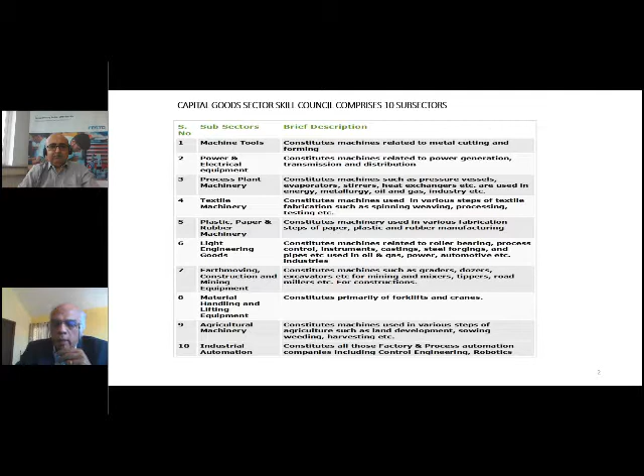From the year 2013 by the Skill Council, which is established jointly by the Federation of Indian Chambers of Commerce and Industry and the Department of Heavy Industries, anchored by the private sector of capital goods industry as well as public sector, and Ministry of Skills and National Skill Development Corporation.

It is chaired by Mr. Sunil Chaturvedi, who is heading himself. He was an IAS officer and then followed by heading a company called Tractors India Limited. We have a big team of people across the country, mainly headquartered in Delhi.

A total of 55 qualifications, which mean job roles, comprising over 96 unique national occupational standards, have been developed by the council. All the qualifications have been validated by a minimum of 30 companies belonging to large, medium and smaller enterprises. All the qualifications are now aligned to the National Skills Qualification Framework, and that has been finally registered into the National Qualification Register. They are also mobile internationally.

The main task objectives of this council are to develop national occupational standards and qualifications. At the end of a few more years, we will have 250 qualifications comprising many job roles, including future job roles which are emerging due to Industry 4.0, and affiliation of training partners and educational institutions to deliver the standards.

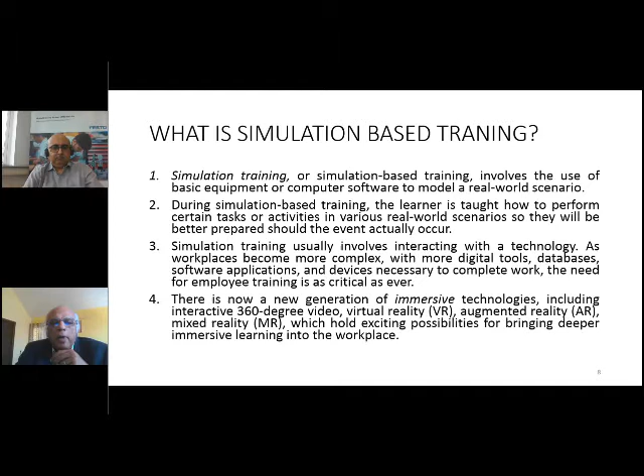And last but not least, there are now new generation of immersive technologies, including interactive 360-degree video, virtual reality, augmented reality, mixed reality, which are holding exciting possibilities for bringing deeper immersive learning into the workplace. My last slide is to tell you briefly the 8 benefits of simulation-based training.

Simulation-based training gives you real-life experiences. The instructor can give immediate feedback to the trainees. There is a lot of knowledge retention compared to just observing a PowerPoint presentation, because they are very closely interacting. It is experiential-based learning, so knowledge retention is very good.

The risks are minimized because it is not actually a real life situation. It is only simulating the real life situation, so we can afford to make a couple of mistakes and correct ourselves before we launch into the real life situation.

There is quantifiable training. Everybody can be measured, the training can be measured, and it could be used as part of further improving the training programs, or assessment and certification of the trainees, or even for their performance assessment during their actual working in the factories. And of course, it can also be used for multiple purposes.

Simulation is not necessarily only for training purposes. It can also be used for actual augmented training during the on-the-job training concept. And very, very important, simulation brings down the cost of training and also the speed of completing the training and going into the real operations. Both cost and time are reduced.

Finally, there is a lot of cooperation between the trainees and the instructor. The trainees can teach each other and the overall synergy is very high. You can also have competition during the simulation of a group exercise where you can have projects, and the trainees get very much benefited from this.

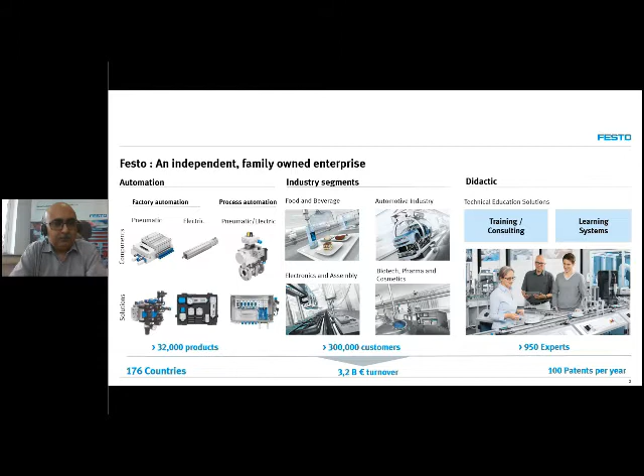A part of Festo is automation, a part of Festo is didactic, and it's the best symbiosis we can have for industry and education. Automation has components and system solutions to increase productivity of machines and systems, and from the didactic side, with learning systems, training and consulting, we increase the efficiency and productivity of people in the organization. This is what we as a group are doing, increasing the productivity of more than 3 lakh customers worldwide that we cater to.

In terms of technical education solutions, we have a holistic offering in terms of education, wherein we have a lot of equipment. We come up with a lot of holistic curricula with support for lab design and preparing the trainers, ensuring the right delivery of the offering.

In terms of industry, we support with consulting and training on different topics through our own training centers and also partner training centers. As a group, we also support in terms of qualification. We run dual vocational training programs as per the German system, which is worldwide renowned. We do it even in India, and we'd be very happy to share such experiences.

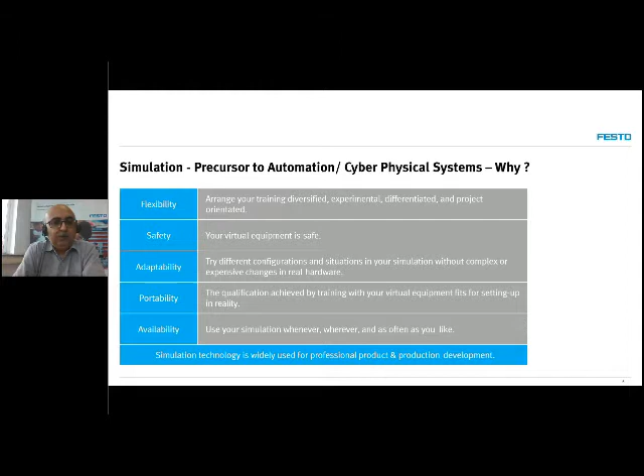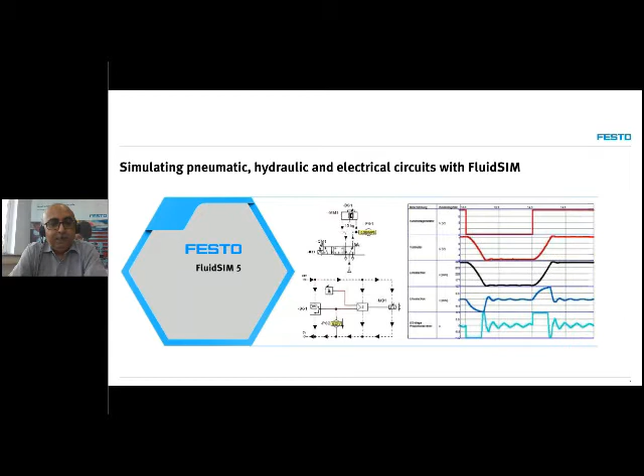Our presentation and live demo is done in two major parts. First we would touch on the schematics - how pneumatic, hydraulic, and electric schematics are simulated, and how we can take benefit of that. We as colleagues from Festo have software, so as an example we are using our software, but it can be taken in general for simulation activity. For the schematic part, we will be using FluidSim, where we will show you a demo after my next few slides. So basically what one should look at in simulation as a tool, whether you want to learn, teach, or design in the industry.

It has to be interactive in terms of virtual devices, the library part, how intuitive it is, how fast are the simulations, and the failure model and diagnosis. When we say interactive, FluidSim allows both convenient creation of schematics as well as interactive simulation. It can also be connected to external hardware, going into exactly the case of digital twin, how you connect software and hardware together and have a seamless integration. This becomes a very fundamental learning from that perspective.

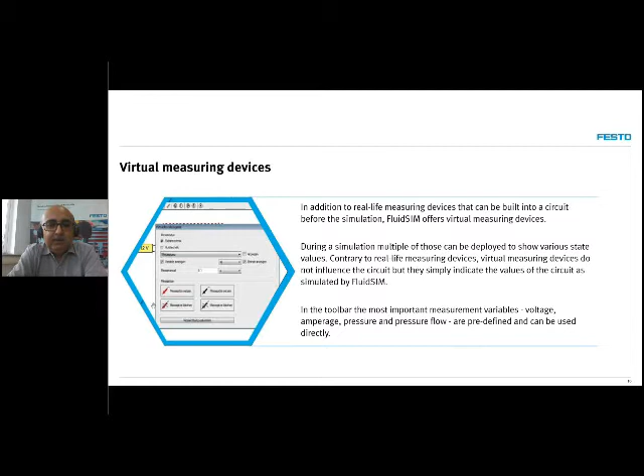Then virtual measuring devices. In our systems we have devices, but when we need to add more physical devices, it may take part of the power or reflect in a certain part of the schematic. But with virtual measuring devices, we can deploy them into the system without affecting the working of the schematic. As standard, FluidSim supports certain measurements very easily, like voltage, ampere, or pressure flow, which are predefined and can be used directly.

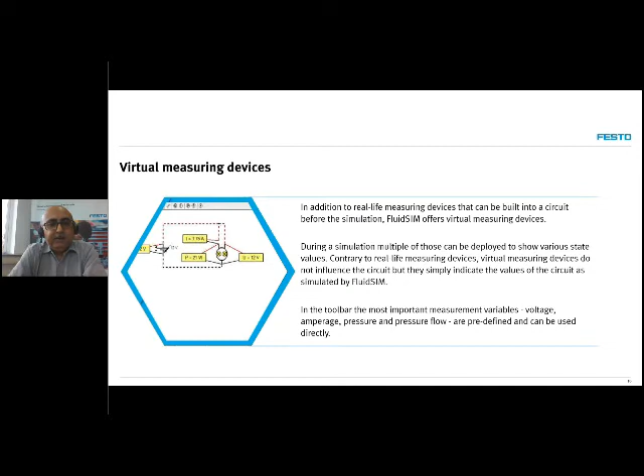The library of symbols is important. On one side, it helps you create the schematic faster with the availability of a large pool of symbols. On the other side, it's also very important that symbols are used as per standards. That's very important to have in any simulation tool.

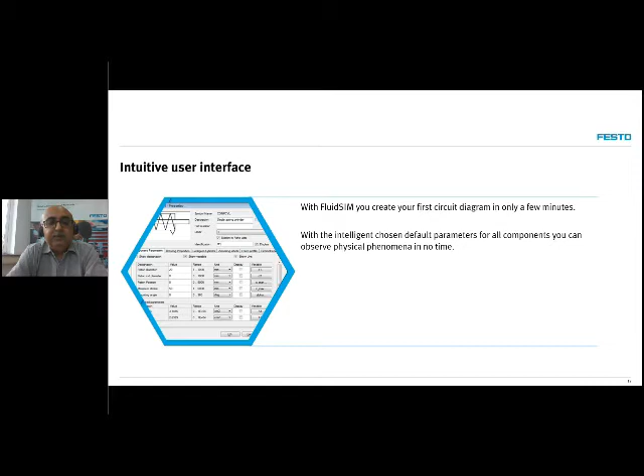The intuitive interface, I will not talk about it. We will actually show you how intuitive it can be, how fast you can draw a schematic, how you can simulate it, and how you can observe the different parameters in the system.

Yes, it has to be lightning fast. FluidSim, as we said, we have been there since the early 90s, and we have been consistently designing it for higher speed, which is very important because a simulation tool's testing has to be in real time. For example, if you define different parameters to a component, you should be able to see the difference in their operating, based on those parameters. Some part could be visible through the naked eye, or even through different reports. We will try to show you a small part in our demo of how it is important to have testing in real time.

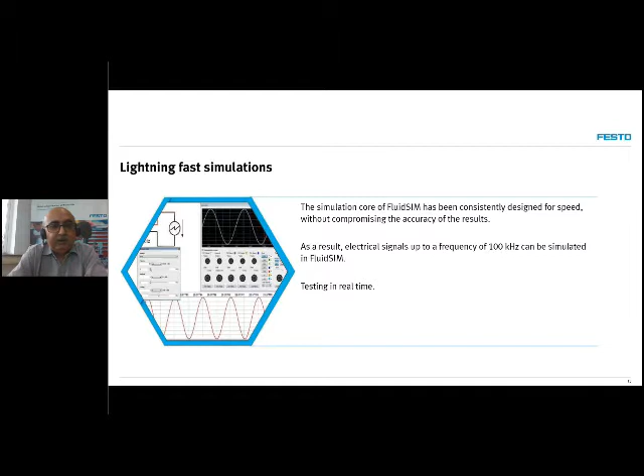And with any learning model and maintenance part, without going into details of preventive maintenance, it is very important to understand how we can look at failures and how we can diagnose them. That becomes a very important part of a simulation exercise.

So now I will invite my colleague, Mr. Senthil Kumar, to offer you a small demo on FluidSim. He would do it in 3 parts. The first part would be a very small schematic to draw, showing how easy it is to draw with FluidSim and simulate. As a second part, we would show how we can observe the difference in parameters of 2 components in terms of reports. And third, we will briefly touch on how, if there is an industry application problem or a learning task available, how to go with it, observe it, create a schematic from there, and then work on that.

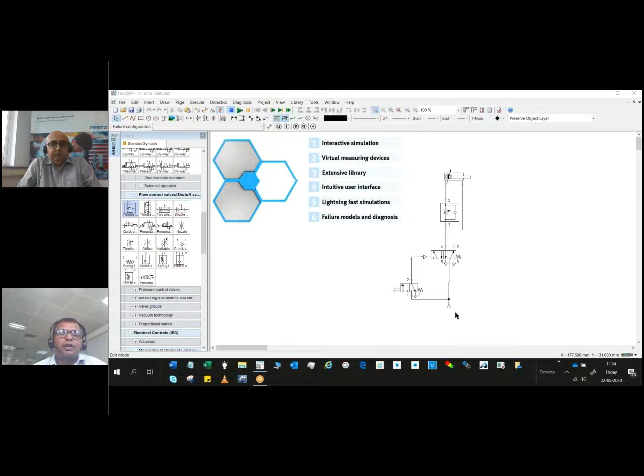It has got a component library with all the components frequently used inside automation, which can be easily brought into the working area to create a circuit. I have made a circuit ready-made, and I will also show you how exactly this can be realized.

If you look at the possibilities with simulation, we can run variations. We can change the parameters without even incurring any cost.

But if you look at the real situation where you have to make changes, you have to wait for days, procure them, and finally include and make a decision.

Further, as we realized, it involves risk assessment, in the sense that you can very easily minimize the risk. Having to build something, make it work, and have it break or result in some unsafe eventuality - simulations can help us minimize those things.

We can reproduce this infinitely, with no cost involved, because the component libraries we see here can be used innumerable times in this working arena, and we can realize whatever we have in our imagination in practice.

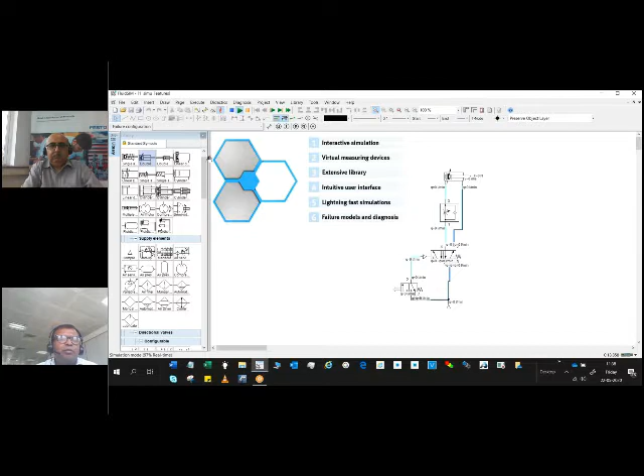Making a circuit with pneumatics, electrics, hydraulics, or closed loop pneumatics, whatever the thing is, is not a very cumbersome process. It is made very easy.

You can only click on the library and drag and drop those components, pull out any component from the component library once we are aware of the basics of the technology. I am recreating the same circuit that is being done here.

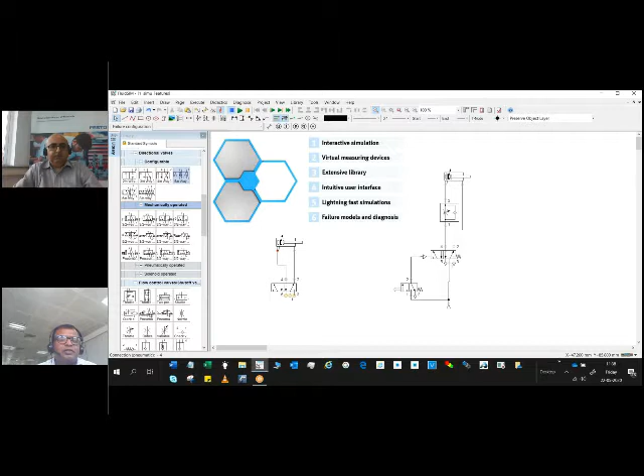The connections here are actually very easy - you go to the node, drag and drop them, and place them inside the circuit. The supply of air is what we require.

We might also need less of those things, so we will try to pull any of the flow control valves or whatever is necessary here to make use of that.

Since I have already done this, I will try to simulate this circuit. It is very easy to do this - that's what I was trying to explain to you.

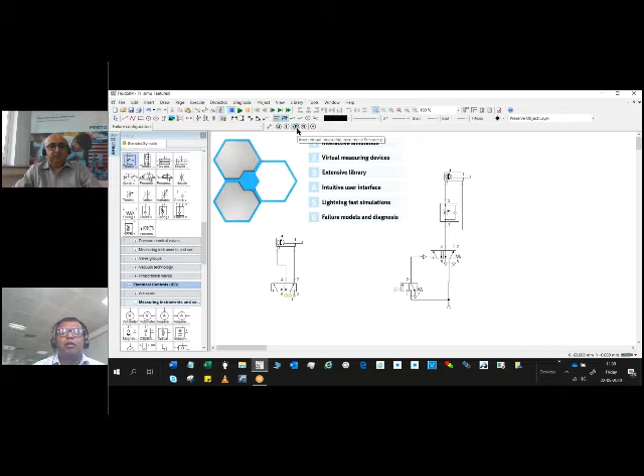So as you go along like this, there will be this circuit which I have drawn here. I just click on this, so I can switch on the thing. If I want to include any virtual measuring instruments, I can bring it over from the arrangement here. Say I want to bring in some pressure control, some pressure gauges or something like that. So I can connect it over here and start to simulate this.

So here we can see the same thing. What happens in this situation is the pressure over there is about 6 bar. You can realize that momentarily, at every instant, dynamically, we can realize what exactly is happening inside the circuit. This way we can bring in any of those measuring instruments, any virtual instruments as such.

It is very easy. Of course, it will not load the circuit because it is going to be working on the mathematical formula rather than on the physical connections that might be existing over there.

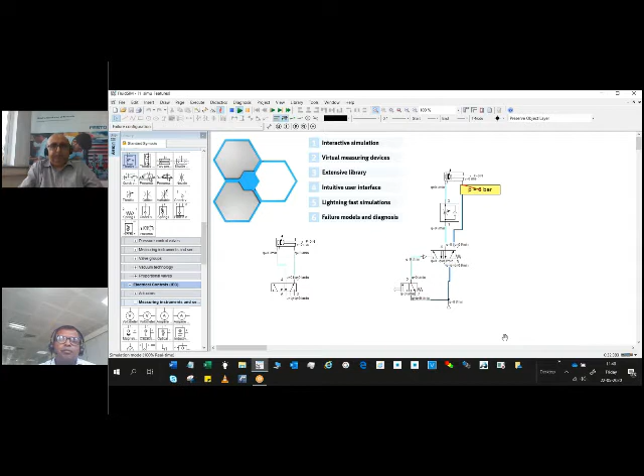So this is about a few of those features which we described a little earlier. We will look at the other possibilities here.

So FluidSIM, as I was telling you, can dynamically display the status of every element inside the control. This way we can realize, optimize, and fine-tune it to precision whenever expected. Here are two cylinders which are of different sizes in the same arrangement.

We can configure this cylinder just by clicking the button over here and changing the parameters in the circuit. So basically you can create some loads inside the arrangement, or change the component details, such as the piston diameter and rod diameter. This has been made in such a way that it can include a complete range currently available in the market.

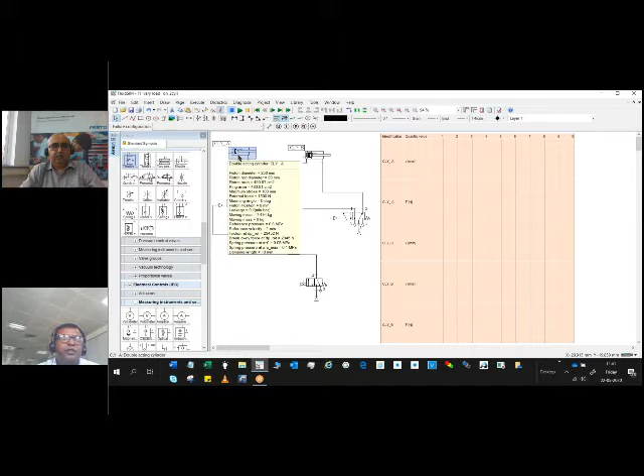So that is what we can see here. Let us try to simulate here. Of course this is configured differently. You can see there it is subjected to a load of 1500 newtons, whereas here it is subjected to a load of 5000 newtons. Let us see how exactly we can try to depict the performance of the cylinder here.

So this is based on the time-based arrangement. It is able to give you a complete picture of how those cylinders are reacting at various stages inside the circuit. You can see a lot of ripples coming over there, which is nothing but the slip-stick motion being executed by the cylinder there, which can be seen.

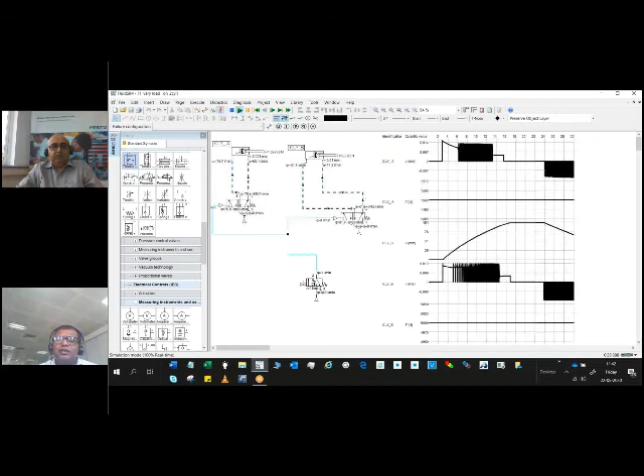If you extrapolate this graph, you can also see what time it is happening and to what extent these are seen there. So that is the other part of simulation. Further, let us go into the next slide here. So this is the other feature there.

We have many situations where we have to realize many of the applications on the shop floor. Here is one such application where some pins are contained inside a hopper, which needs to be pushed one after the other. The pins are to be fed continuously by to and fro motion of the cylinder.

The feeding of the cylinder has to stop when the stop button is pressed. There is a double acting cylinder inside this arrangement which has to reciprocate, which means we need two position-dependent controls, and in addition we have a push button to start the operation, by which it can continuously reciprocate, and by press of the other button it has to stop. So this is the graphic, the positional sketch which is existing to be constructed on.

This is to be physically replicated later on after validating with the help of the FluidSIM. Having had this problem, there are possibilities that straight away we can go and construct it and try to realize the deficiencies in terms of outputs, or whatever is the expectation prescribed. Otherwise we can try to do simulation, which as we talked about saves us cost.

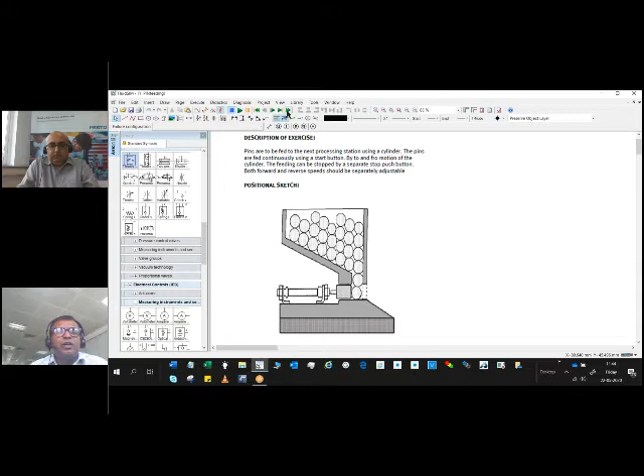So here is this arrangement where, with the help of simulation, we can try to build this. Here is the circuit for the pneumatic circuit. I will show you two variations on this. One is the pneumatic circuit, and finally we'll discuss the possibilities in terms of flexibility, safety, adaptability, portability, and availability. So first let us go into the simulation here.

So here is the circuit. Now you can see many of those features in terms of the flow, the pressure, which has been called for to be exhibited when it is moving, and this is not a static one. It is going to be dynamically displaying all those things, like of course the forces are also going to be displayed here.

As I was explaining, these are the two buttons which are to be used here. This is for the start and the other one is for the stop as such, and these are the two positional dependent controls that are going to be available here, and the cylinder has to reciprocate as such, and of course the speed has to be controlled as such.

So let us see what is happening here. You could see the cylinder getting reciprocated in and out, and you could see visually there what is the speed. Velocity is being described over there, and it is possible for us to clock how many times the cylinder will reciprocate, what will be my production output as such.

The circuit is flexible enough because we can at any instant stop this thing and add different elements that might improve or enhance the performance of the circuit as such. So that way it is very flexible.

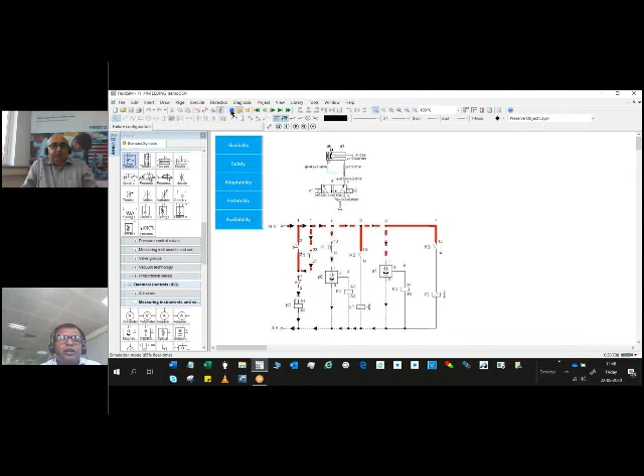If we have noted down the speed earlier, and we see how this is going to react and how fast it is going to work in a minute or something like that, it will also try to improve and optimize the thing in terms of the controls. So that is about the pneumatic, electro-pneumatic part as such.

We will now try to go into the other important feature in learning situations, in maintaining the equipment at our plants, in trying to teach the employee, the operator, whether he is able to do certain things here. Here is a simulation which can be included inside the FluidSIM, where we can create errors in all these components. For simplicity's sake, I have included a very simple circuit inside the arrangement.

So here, we are trying to teach them, or maybe explore what is the skill level, then look at what is the training need or skill gap that is there, and include some training as such.

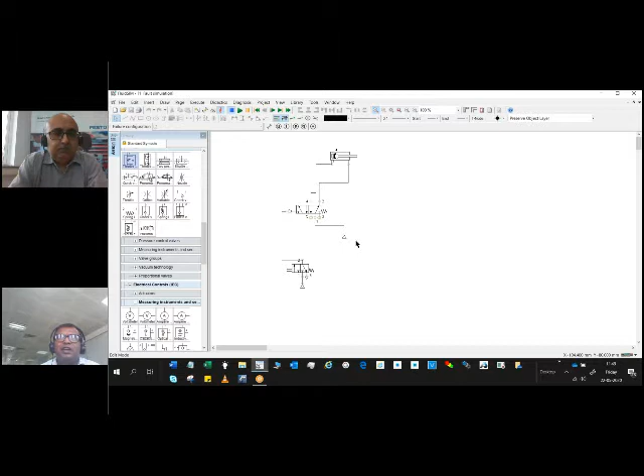So here is this arrangement where we have specifically included an error inside the circuit. When I press this, it doesn't work, because there are realistic problems that can occur in the physical world included here in terms of the valves or something like that. We try to impose certain errors or faults inside the circuit that the maintenance person can identify, as this can exist in the actual machine.

So I have included this, and of course the circuit doesn't work, which can also exist in the physical arrangement. So I will ask him to maintain it or troubleshoot this arrangement. I specifically go to this place which is wrong in terms of identification, which is also depicted over here. That means he is not realizing why this problem exists or how it has to be effectively tackled. It is only going by trial and error.

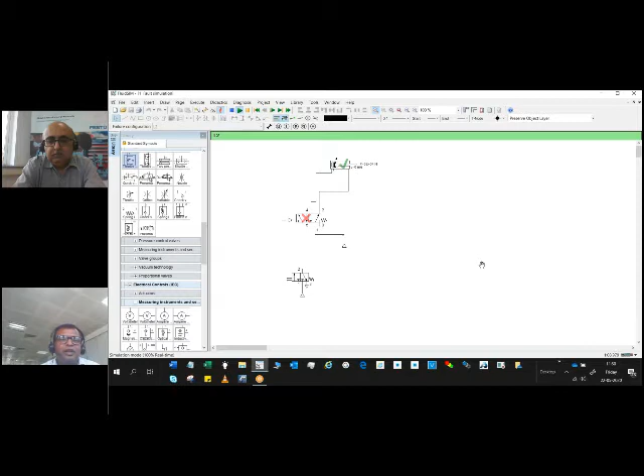Let me do one more attempt with this. I will try to see the problem is here. Yes, this was the right thing that had to be identified at the first instance. What I did is I placed excess friction inside the cylinder, that's why the cylinder is not moving.

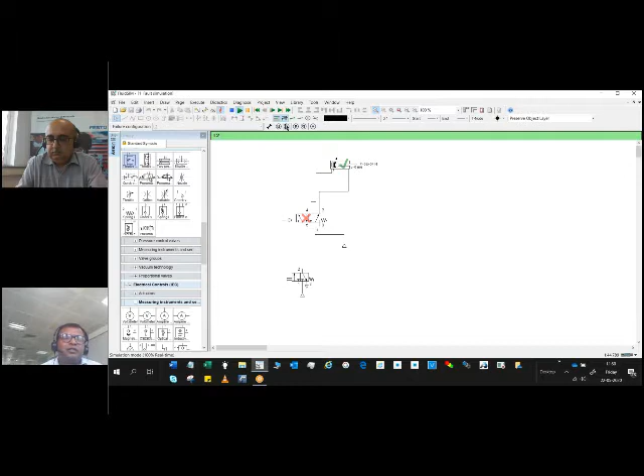Similarly, for every component, all possible failure possibilities are included, which can be selected and used for training purposes or to troubleshoot in a virtual world. So without spending time, energy and money, we can very easily realize this sitting on simulation and explore these things. These are the things I wanted to briefly tell you.

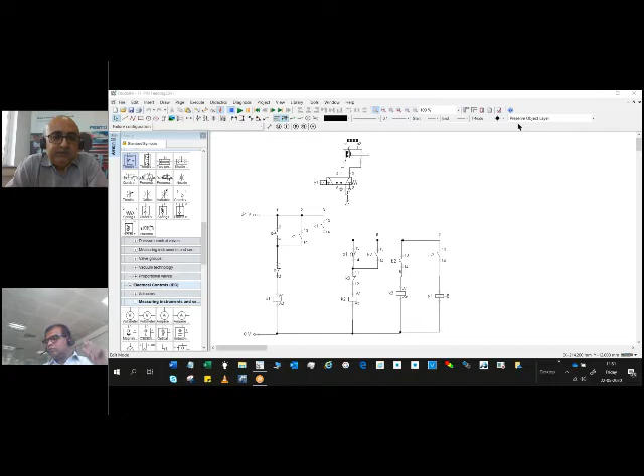Because of the time paucity, he had to rush and show just a few things. But the idea was to demonstrate how to use the tool for designing, teaching, and learning. The best part of simulation is, because of the current situation where we have to work and teach remotely, this becomes a really wonderful tool. May I please request the screen for presentation so I can have a very short, quick session.

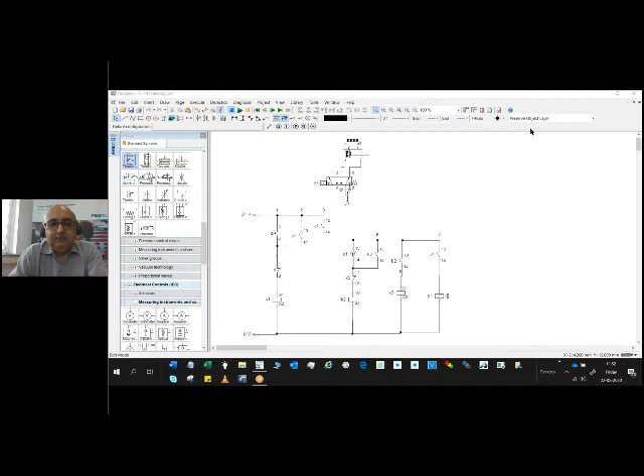We will move into more automation with mechatronics as a topic, and also robotics. Very quickly, looking at the time, I will rush through my part of the slide so you can have a view of the system itself. We talk about sensors, the PLC, robotics, and fault simulation, which Sendil has covered in detail, very briefly on virtual reality, what institutes today would like to work on for research, and a suggestion on simulation as part of curriculum.

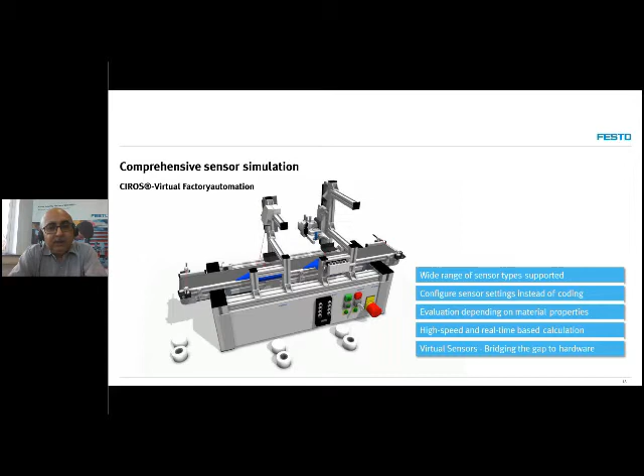So the next tool for simulating the automation side, we have a platform called CIROS, which we'd like to demonstrate, which supports a lot of sensors. The best part is you don't need to use a coding language or other methods to work with different kinds of sensors. Basically you configure a sensor, and just like our FluidSIM software, this is also a high speed, real-time based calculation, which gives the best idea for simulation.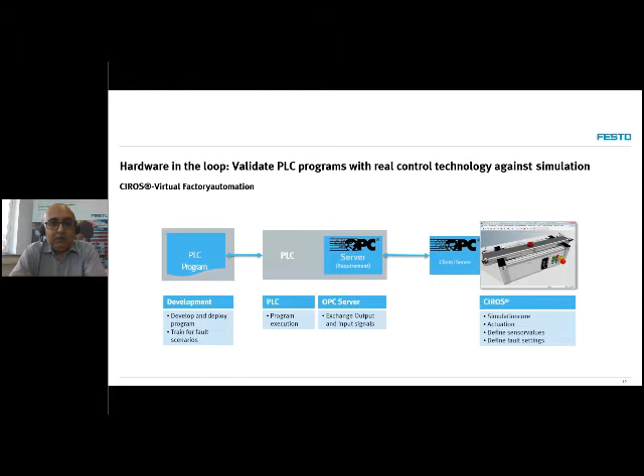It works at a hardware-in-loop level, so we can validate different PLC programs with real control technology against simulation. The system has a lot of predefined models, and new models can also be created, and any PLC can be used to connect to it to validate the PLC programs, through an OPC server, so it could be any PLC.

We have a device, EasyPort, through which any physical PLC can be connected. Here we are depicting Siemens as an example, but whether it's Rockwell, Mitsubishi, or Delta, you name the PLC, in general it's a PLC-independent system that can simulate.

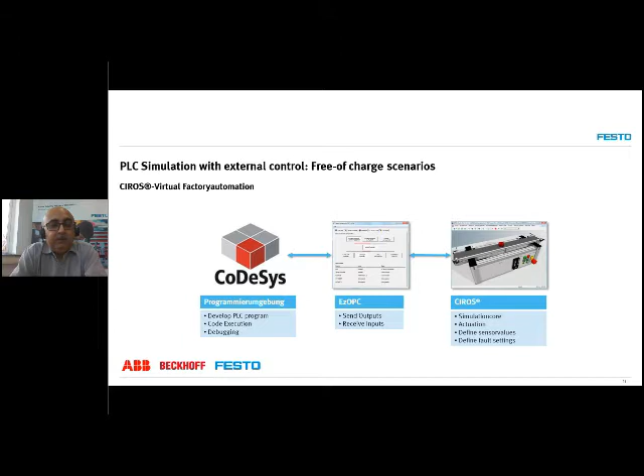Different manufacturers like ABB, Beckhoff, and Festo use Codesys as software, available in the market or as a normal download, and this can also be directly connected to the system for simulation. This gives a wonderful platform to validate already-done PLC programs, and for teachers to propagate and train students, and for students to have different tasks prepared.

Similarly, we will go on to the robotic simulation, which we will show. In robotics, just like in PLC, certain robot manufacturers use a standard model for programming the different robots available.

Certain robot manufacturers like ABB, KUKA, Mitsubishi have their own language for programming the robots. In our software, especially for Mitsubishi, we can directly download the software online onto a robot. So here again, we work with different robots in the system to enable a better understanding of different robot programming languages, and also as a tool to use from a varied perspective.

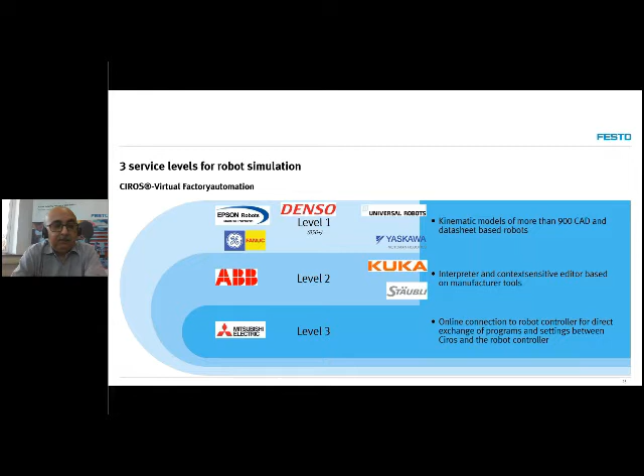This is what my colleague Jagdishan will show. I've rushed through now the next few slides.

Just like FluidSim, here also we can prepare a lot of fault simulation with different scenarios. A trainer can set up the fault into the system, distribute and activate it. The students will have to work to detect it, and a log would be created on how they went about detecting the problem. Then the trainer can evaluate the log file and see whether the student has understood the system properly and the right way to diagnose the problem in an automation system.

The CIROS software is also just a click away into the virtual environment. So today we use virtual reality to have a physical view of the system without having the system in place, and this is very much possible with the simulation tool.

Also for research today, the systems have to be connected to different external tools, MATLAB for example, which is possible with CIROS, and also to connect it to MES software, which is the backbone of Industry 4.0. So this is all possible working together with CIROS.

CIROS is not per se a normal CAD tool to draw a design. You can import a lot of your different stations and all what you have, that can be imported into CIROS and exported back. So this can really help as a tool where you draw the power of simulation available in CIROS.

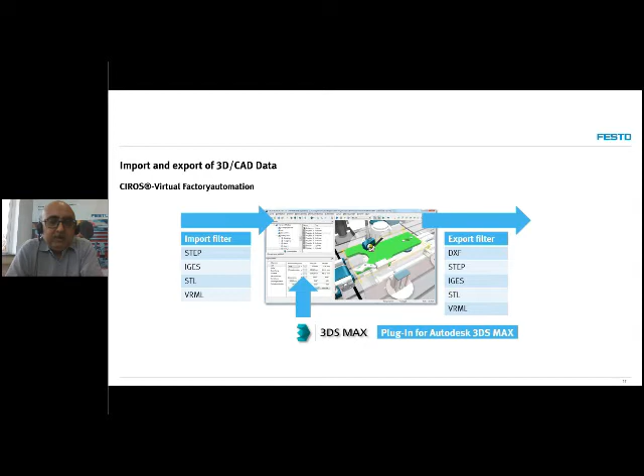And last part of my slide, sorry I'm rushing through because I want you to have more time on the software to see, because that is what you will really appreciate.

Important part is how we can use simulation as part of curriculum. The simulation can be used on one side to identify the problem, on the other side to iterate different solutions which are possible. Then there could be a virtual commissioning of the system available, which takes into validation and verification the complete programming, the complete commissioning, having a prototype run done, and then also seeing a small parameter change, for example to understand the cycle time and how you can better the cycle time of the system and things like this.

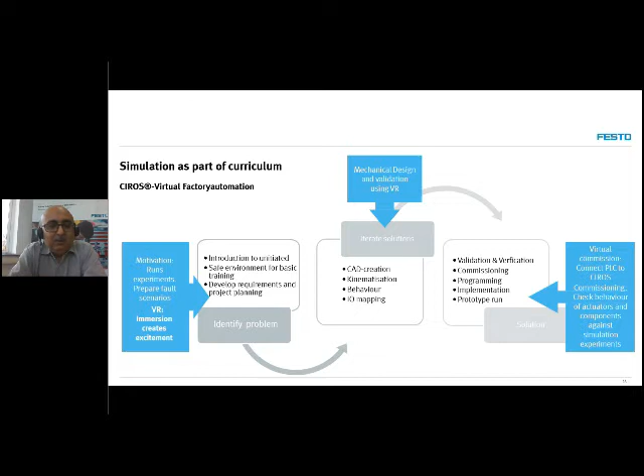Lot of variants and topics can be created by the trainer, which can really motivate the student today, because we know the generation today is much more tuned to digital working than the generation earlier, and therefore they also need some very intelligent tools to help them enhance their learning. One of the things we say through simulation is to give the student that confidence, because there is no fear in his mind to do anything or try anything, and that is what a good student is all about. We give him the right platform to work on it.

Just my last slide, it's not just a thank you, because we are going to the next level, for people who are tuned to industry and want to learn more on automation from nature. Festo has, some of you may know, but for others, is very much active in bionics, learning from nature. So you can go into Google and see Festo Bionics. It's a wonderful world to learn and see how you can learn from nature.

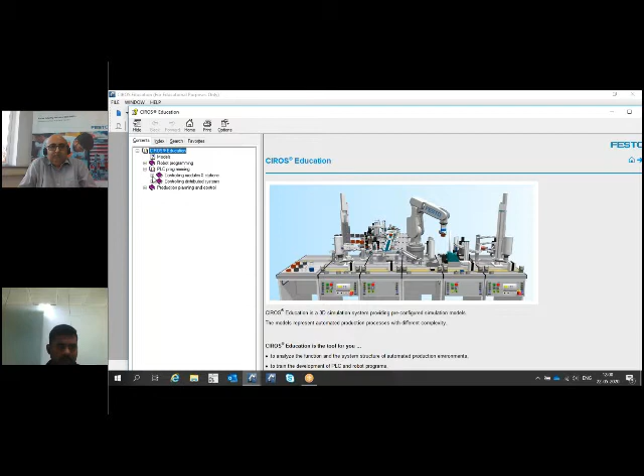In the CIROS software, there is an industrial model called distribution station. This station comes in the initial stage of the industrial production line, where you put the raw material in, and the station transfers the product to the other stations. This is the station we have in the CIROS software.

Then there is another station called measuring station, which is one of the inspection stations. Then we have a station called handling station, which is a typical industrial application doing the pick and place operation of workpieces or products.

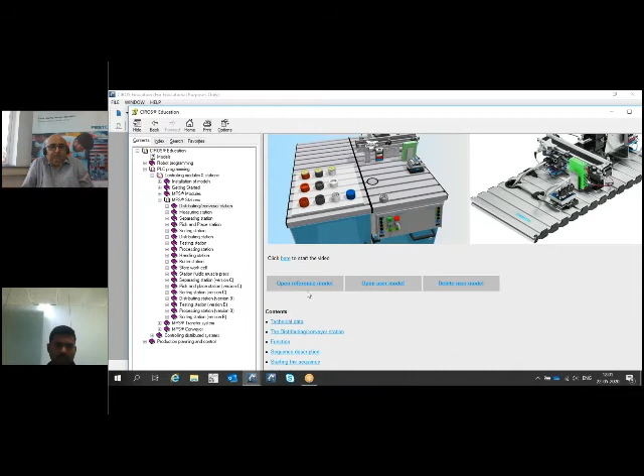Now I'll go with the model called distribution conveyor station. On the right side you can see the real hardware station, and on the left side the model we have in the CIROS software. If you want technical details, or addresses of the sensors and output devices like motors and cylinders, these are the I/O details of the station.

This station also consists of a control panel, and these are the I/O details of the control panel.

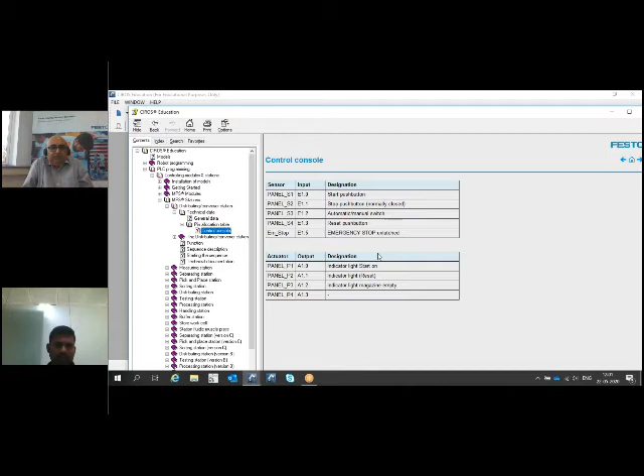Now let me load the station to the main project screen. Okay, now I'm loading the station. So now the station is loaded to my main project screen. There are two things you can see here: on the right side there is an I/O monitor, where you can see the status of the I/O, whether it is in the false or true condition.

Now I'll control this model by an external PLC program. To do the external PLC programming, I need to change this controller from default to a software called OPC. Now I change the control to external control.

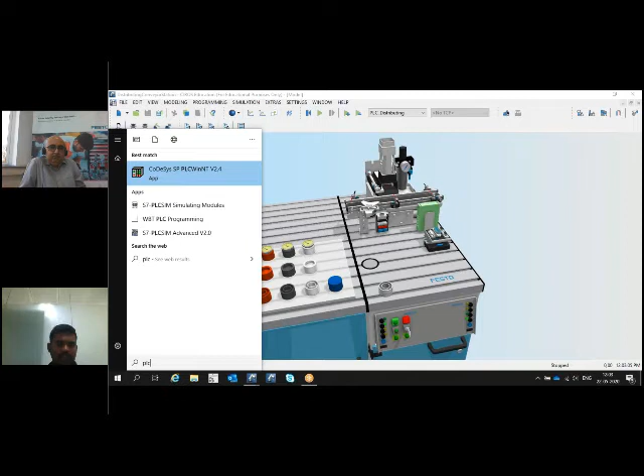Now let me open the software Codesys, version 2.3. Then there is another software called Codesys SP PLC WinNT, which is the soft PLC of the Codesys platform. Waiting for the Codesys software... yes, this is the Codesys software.

So here I create a new program: File, New. There is no hardware device, so I'm going to do the software form, which is Codesys PLC WinNT. I'm going to do the PLC program in ladder logic, that is LD here. Clicking OK. Before going to programming, we have to assign the I/O details to the Codesys software.

This is the I/O details of the particular station. Here you can see the inputs of the station, and these are the outputs. For example, there is conveyor forward, conveyor reverse, advance feed separator - there are 4 outputs in the station. Then there are 4 outputs in the panel also, and the same way we have 5 inputs in the panel.

Now I'll do the program here. But before doing the program, let me tell you about the station first. In the station, you can see there is a control panel. Let me move the control panel to make it visible to all.

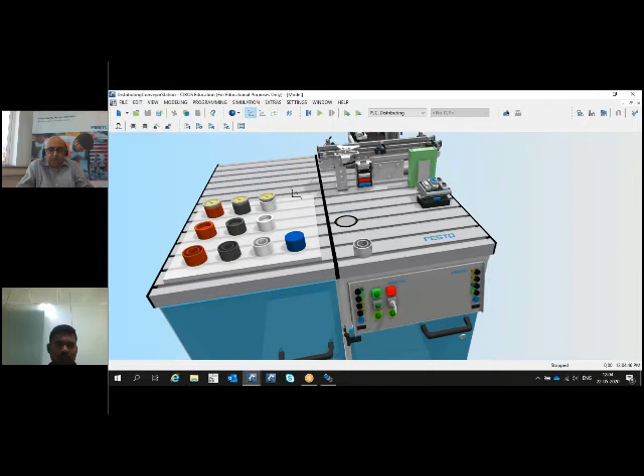Here there is a green color start button, that is one input. There is another red color button, the stop button. Below the start button there is a gray with green, the reset button. Parallel to the reset button you can see the auto manual key. So in this control panel, there are 4 inputs.

The same way, the start button has an LED also, that is one output. Then the reset button, gray color below the start button, also has an LED. Then below the auto manual key, there are 2 green color lamps, which are output devices from the panel.

So next, there are so many models in the station as well. The main things in the stations are stack magazine as well as conveyor model. In this stack magazine, there is a double acting cylinder for ejecting the workpiece one by one. Then there is a conveyor model to transfer the workpiece from this to the next proceeding station.

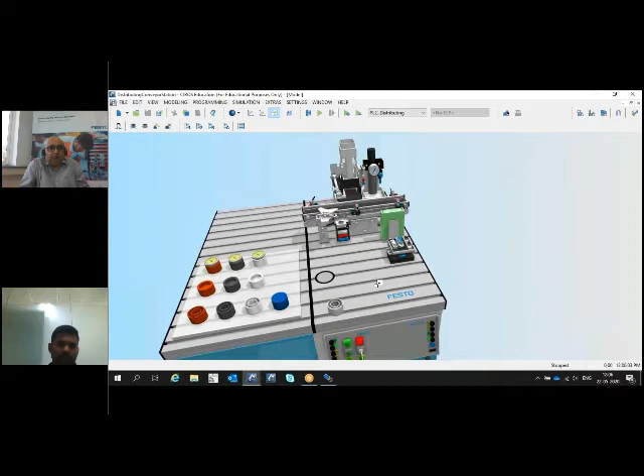With this conveyor itself, we have some 3 sensors. The sensing range we can see in the red color line here. So now I'll make it like this. In the left side, you can see there is a workpiece table. The workpiece table is for feeding the workpiece to the station.

Now I will go to the codesys again. I will start the programming. So as we know the IO details, I will make a simple logic here.

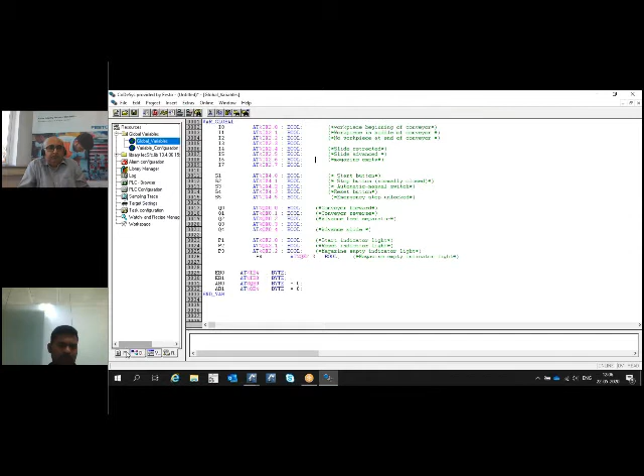So when we press the auto manual key that I assign to the letter S3, then we have another input, that is reset button, that is S4. Here I use OR logic, whether we press S3 or S4. For that, there is a lamp in the control panel, that is P3, and another lamp, P4. So when I press S3 or S4, we get the output P3 and P4. These are the 2 lamps in the control panel.

Then I'll make another logic with that. There is a start button with this control panel, so I assign the name S1 here. There is an output for the ejecting cylinder for the gravity magazine, that output is Q4, ejecting cylinder. Then I have another output, that is conveyor motor forward, that is Q0.

So now my ladder logic is ready. Before downloading the thing to the CIROS, I need to do the downloading procedure before. Let me do the procedures. So projects, options, I need to configure the symbols. Okay, yes.

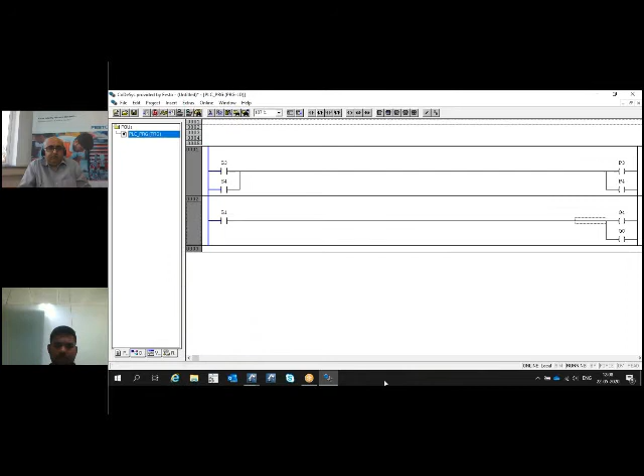Now we can download the program to the soft PLC. So online, yes, login. Now I'll run this. Now let me show the CIROS screen also. Now you can see the programming screen as well as CIROS screen.

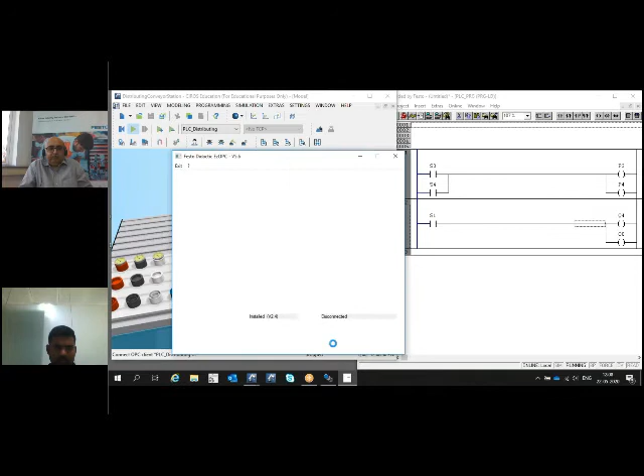Now let me start the simulation of the CIROS. Now we have a gravity magazine in the distribution station. Let me load the workpiece. So now I'm loading the workpiece to the gravity magazine. You can see there, I'm loading now the silver color one.

Now as per the logic we did in the PLC program, S3 and S4, which means reset button or the auto manual key, if we operate any one of the inputs, we will get the output P3 and P4. Now let me press the reset button.

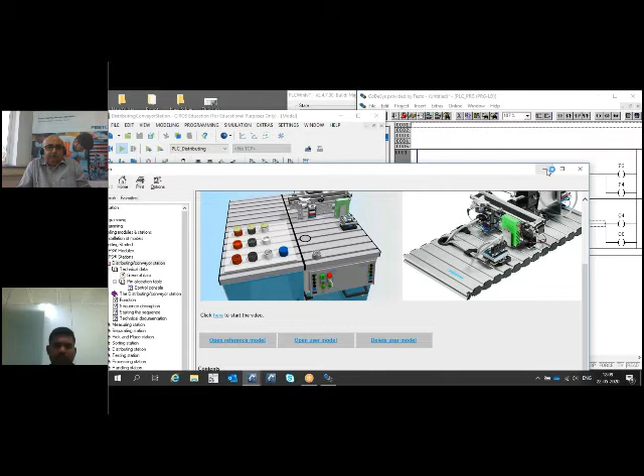So there is a communication issue here. Let me go to this. Let me open the model again. Let's see. I'll open the model again to my main screen. So there is a communication issue in the CIROS software. I'll open the software again. Software is getting open. Now the software is open.

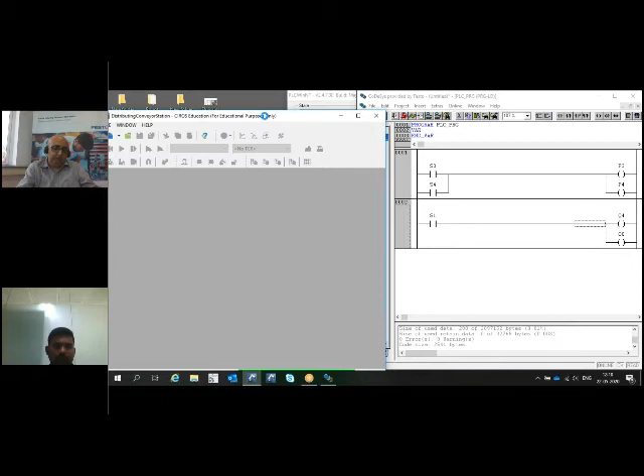Now we have to change the PLC switch because we are controlling the program from the external platform. OPC, yes. Now let me download this CoDeSys program to my thing. Now it is downloaded. I'll start the simulation in the CIROS software. Now it is started.

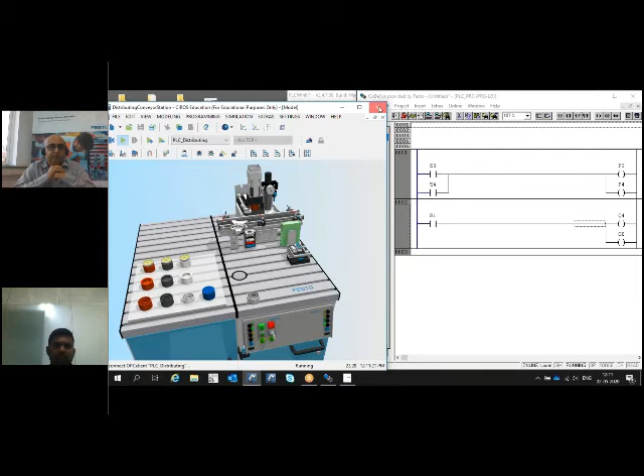Now let me load the workpieces. Okay, I'm loading it, yes. Now as per the logic, if you press reset button or the auto manual key, the lamp should respond. Wait, let me load the CIROS again. So there is an issue in my computer actually, that is why I'm not able to establish the communication between the PLC and CIROS.

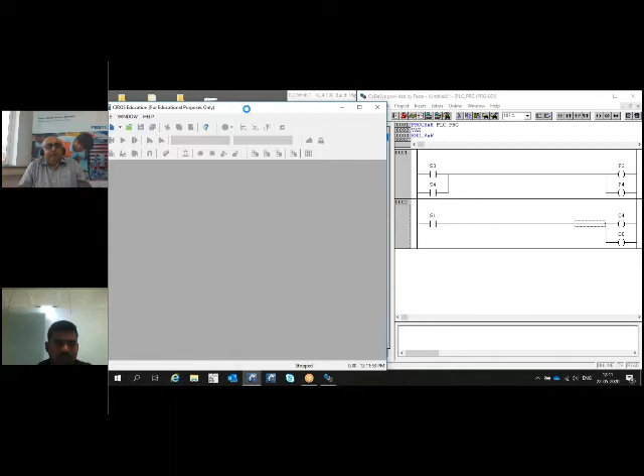I'll open fresh CIROS again. Go to the station now. MPS stations, distributing conveyor. Open reference model.

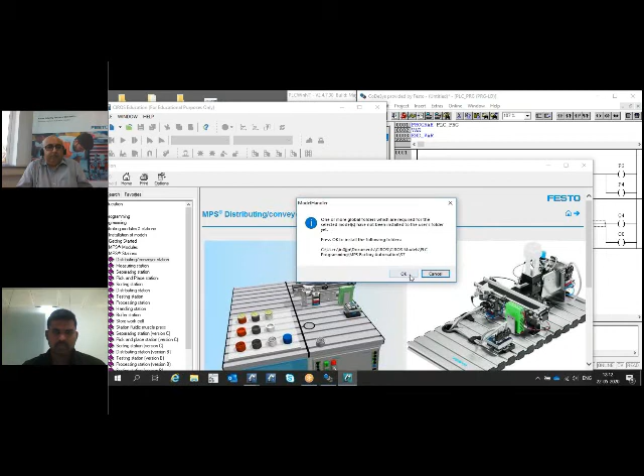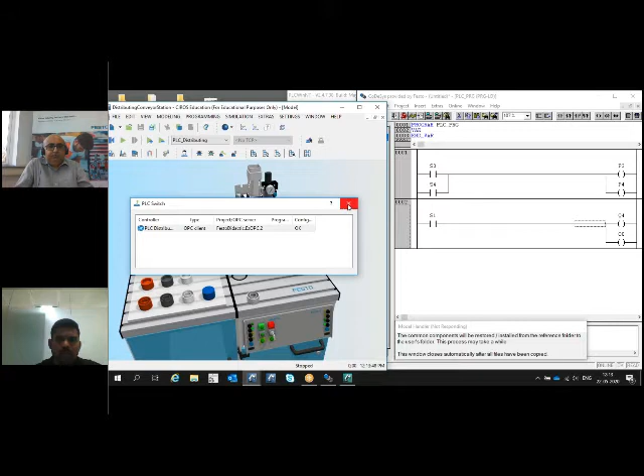So there is an issue in the software.

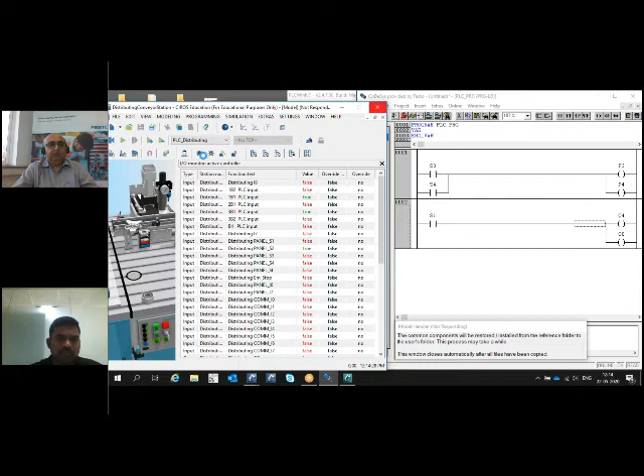Can you show the robot part? We'll ask Sendil to show it till that time. Yep. Give me 2 minutes, sir, I'll do it. Yeah, I'll show this.

Now let me open the CIROS. By the time I will open the CoDeSys also.

Okay, I'll open the new file.

Global variables. Okay, I'll go to the program. So here I'll do the program.

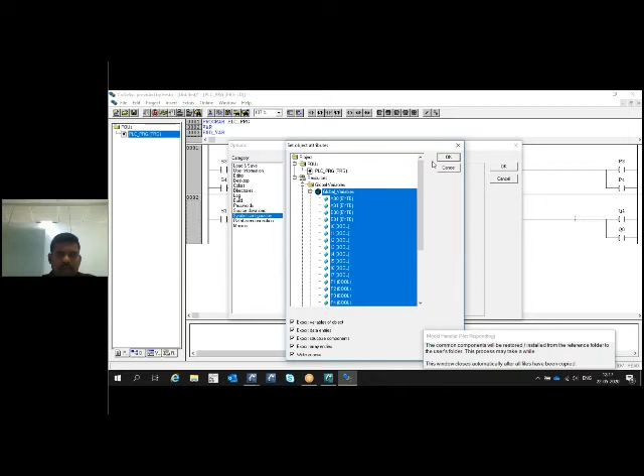So now there is some procedures to do the downloading here. So option, symbol configuration, your symbols, global variables. Okay, yes.

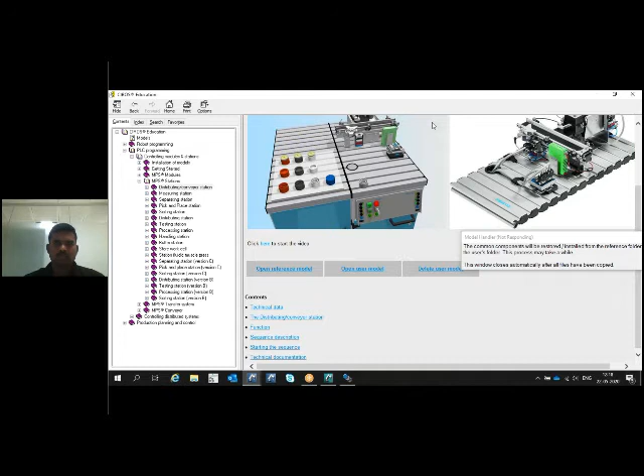Jagdishan, can you move to the robot part? When the question answer session is going on, at that time you can demonstrate the PLC part also. No, so first maybe you show the robot part, so that Mr. Chandramouli can take the question answers, and parallelly while question answer is happening, you without speaking demonstrate the PLC part. Okay.

I'll create the robot now then. So I'll show you the robot.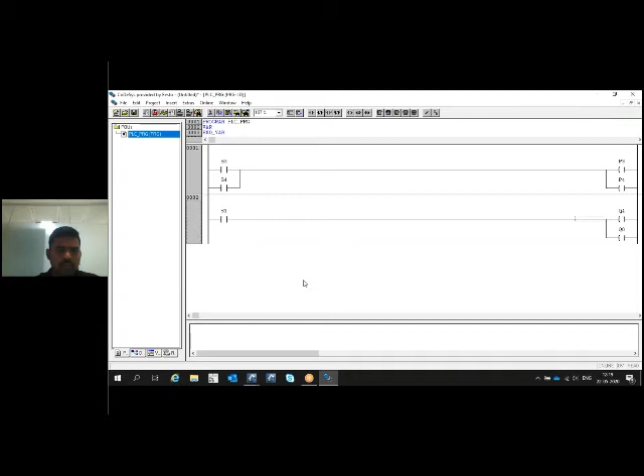Jagdishan, your voice is not audible. What about now, sir? Is that okay? Yes, now Harish's voice is perfect, but Jagdishan is a little muffled and echoing. What about now? Is that okay, is it better now? We now have to move into Q&A very fast. Sure, we will now show the robot part. Now I'll start the robotic program. Again, voice not good. Can you switch that off? Jagdishan, you can switch off your video, then voice will be better.

So now I'll open the robot programming. For that, I'll open the robot in the model library. I'll open Mitsubishi here, and open one of the Mitsubishi robots, RV2FL. Okay, so this is the robot.

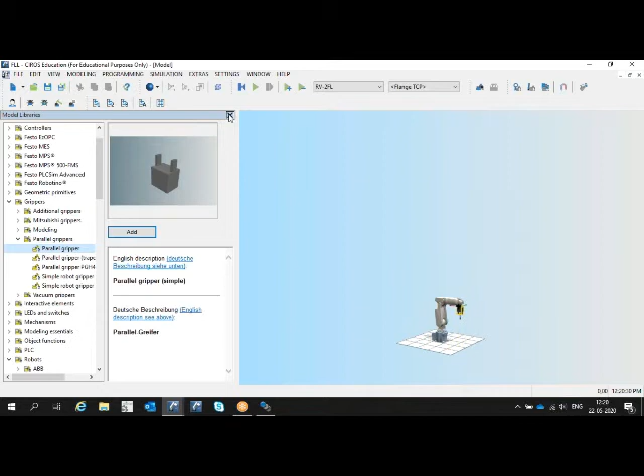So with the robot, I will attach the gripper also with that. There is a parallel gripper, I will attach with the robot. Now I'll move the robot a little bit to the top so everyone can see here.

So now I'm going to show the running of a robot. Before running this robot, I need to create a program as well as teaching points. Now I'll start creating the new project with the Melfa Basics program in the Mitsubishi robot.

So I'll create a name - there is a Melfa Basics 5, so for that the program name is MB5. Then I'll create a position list also. Okay, now this is the position window.

Now let me teach the robot. I'm going to teach the robot in the joint coordinate. We have two coordinates here, joint coordinate plus Cartesian coordinate. Let me start with the joint coordinate.

Let me save this position as a home position, that is point P1. Then let me go to the movement of a robot.

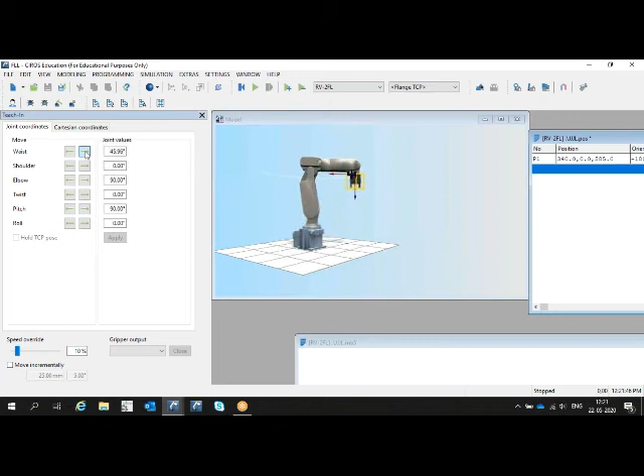So now I'm moving the robot of a first joint. This is a first joint movement, so I'll record this position as a P2 point. Then I'll move the robot to the next motion.

So the same, I'm moving the first joint to the other direction. Okay, now I'll record this position. Then I'll move the another joint.

There is a joint 2 here, so I'll record this position. Then let me move the same joint in another direction. So here I'm moving all the joints and recording the points to show the simple simulation.

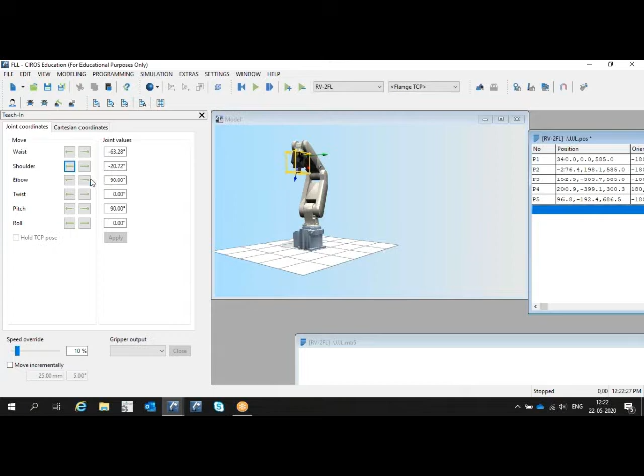Okay, now this is another thing. So now I'll move the third joint, elbow joint. Okay, now I'll record this point.

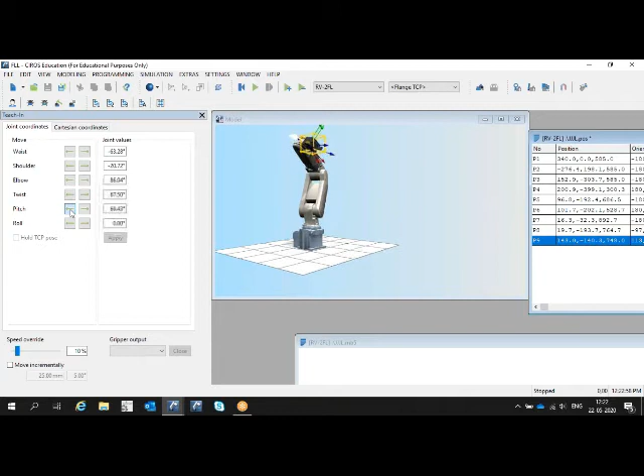Okay, now let me move the twist movement, then the same twist movement on the other direction. Okay, then movement of a pitch, insert, then I'll move the roll movement also.

Okay, so now the thing is ready with the teaching points. Before running the robot programming, we have to start with the Melfa Basics program. So let me go with the simple commands.

So there is a Melfa Basic program command called MOV P1, then there is a command called MOV P2, then there is another command - let me move all the points.

Point 6, then I move the things to P7, then P8. So MOV P9, MOV P10. Then last there is a MOV P11.

P11. Now I can decide at what acceleration I need to run the robot. So there is a command code called ACCEL. Let me move with a meter per second square 300. Then let me decide the speed also, with 500 millimeter per second.

Then if I want to make any delay, there is a command code called DLY. So I'm making a delay 1 second here. Then if I want to make any delay in the point between P8 and P9, there is a code delay. I'll make it 2 seconds here.

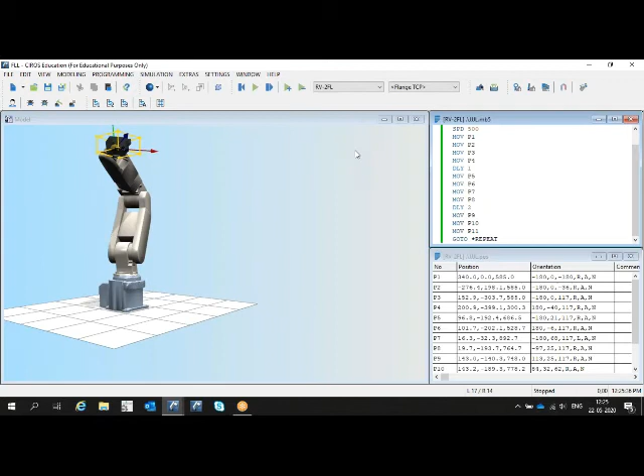Okay, now let me start the robot. You can see here there is a delay happening between point 4 and 5, then there is another delay between point 8 and 9. So the program is running continuously in the repeat mode.

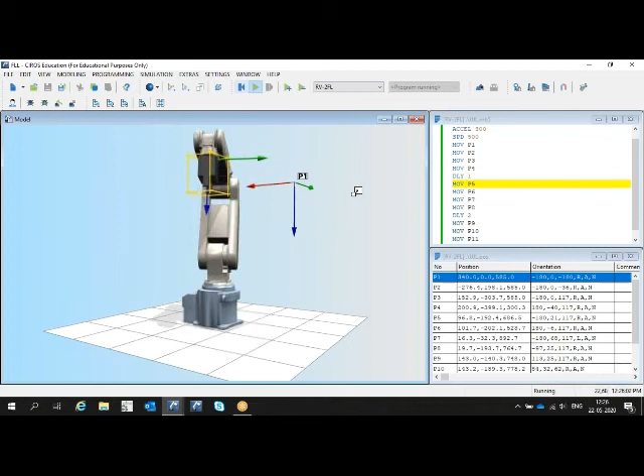So this is how we can make the simple teaching of the robot, and we can simulate the same thing. We can simulate all the robots this way. We can even take the conveyor system in this model, and the same way we can tell the robot to pick and place the objects, so that is also possible here. So I've shown only a simple robot programming here.

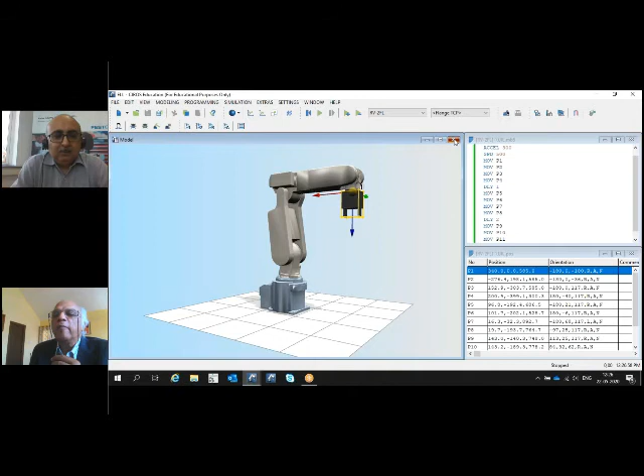Ashwath: Can you please elaborate on CIROS and FluidSim training locations? Whether the training is happening in Mumbai or Ahmedabad? Okay.

CIROS and FluidSim both are simulation software, so it is absolutely location independent. Wherever a computer is there, this can operate. That's on the lighter side, of course. In the corona world, anything is possible from anywhere.

So there is remote training. I'm very happy that today we had the simulation software training, because the first thing we can attack during the corona and post-corona revival is knowledge sharing on one hand and experience sharing on the other hand, and simulation bridges between the knowledge and the experience.

Absolutely. The other day, one of my colleagues, I asked him to conduct a webinar. He said, why don't you send some engineers to come to our factory, it's open? I said, look, to send 20 engineers to the factory versus 200 people listening to the interactive webinar, the benefit goes to 10 times the number of people.

So I think corona has taught us. The answer to Ashwath's question is, it's not only Ahmedabad or Mumbai, it can be done anywhere in the country, anywhere in the world. And the other day I joined a Festo webinar from Germany, and I was so shocked, the electrical engineering is completely taught by the interactive method.